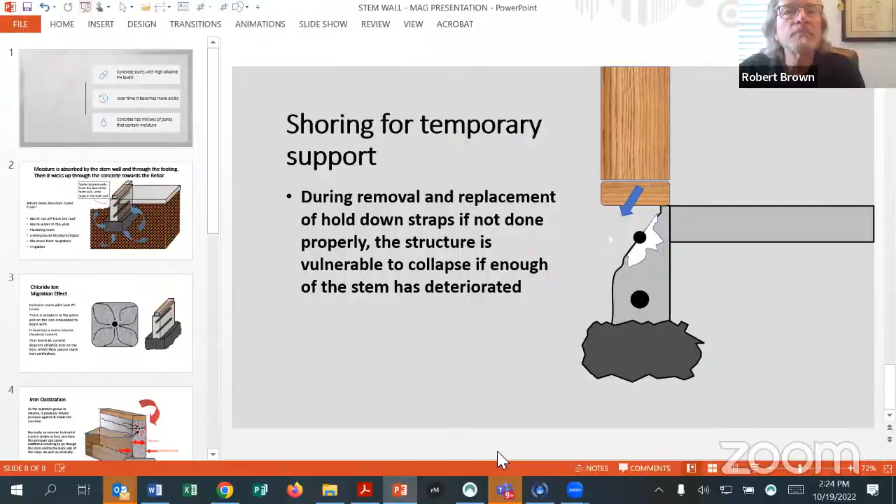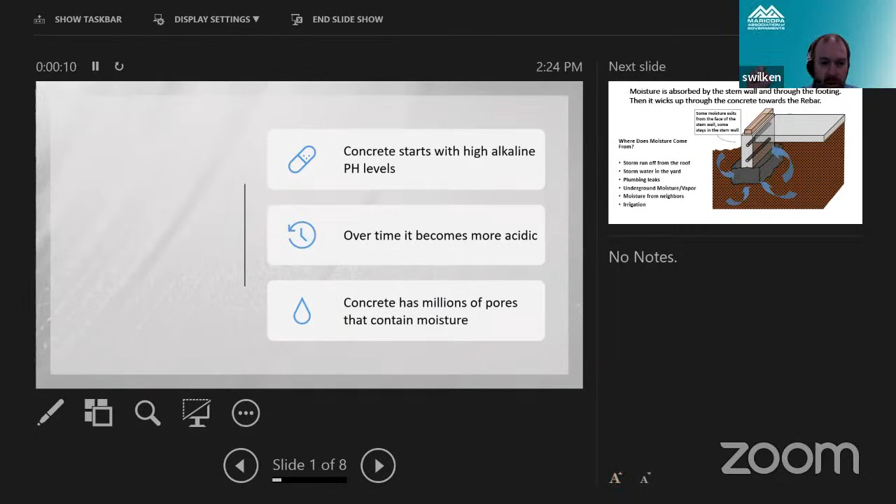We'll move on to item 4, stem wall repair requirements. Presenting is Bob Brown. Yes. Are you ready for me? Yeah, this item is for information and discussion after the presentation, okay? Okay, great. So I'm going to share my screen just to help everybody understand what we're talking about, since it's not widely understood. All right, can everybody see my screen? Looks good. We're seeing the presenter slide portions. Yes, right. Okay, great.

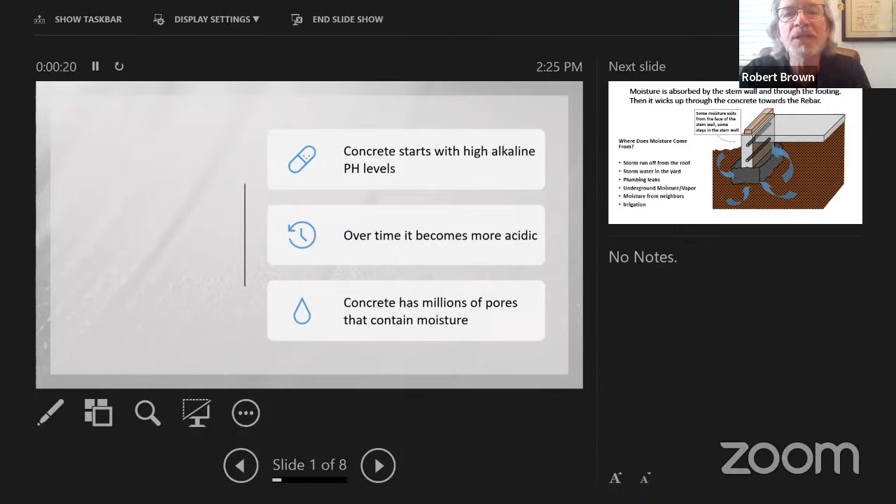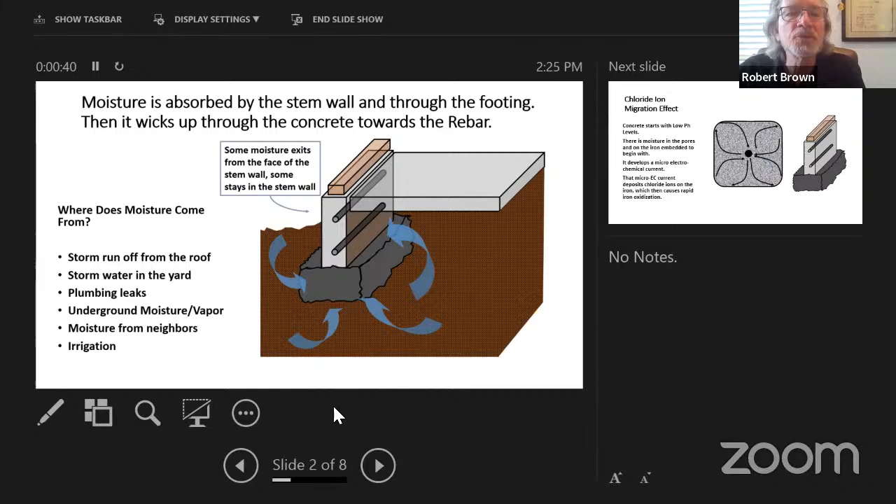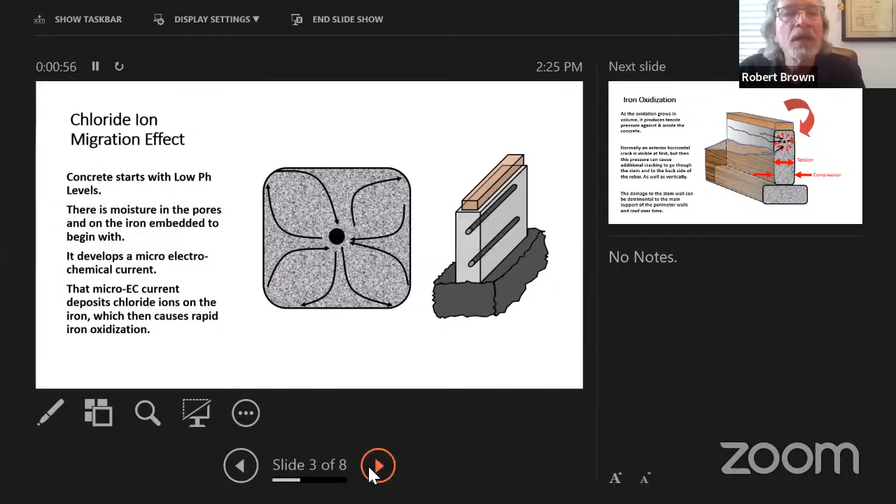So first of all, concrete, as you might know, starts out at a fairly high alkaline pH level. Over time, it becomes more acidic, and has lots of pores that transmit water readily. Subject to the ground, water enters these pores in the concrete, travels up the stem wall, and exits the side that's exposed to the face. And during that path of travel, it intercepts usually the top rebar and causes problems. When that happens, you get a chloride ion migration effect where the rusting of the rebar is accelerated through an ion exchange. And when this happens, the iron oxide basically takes up more room than iron, becomes weaker, but takes up more room and starts putting pressure on the concrete, causing the cracks that you can see here.

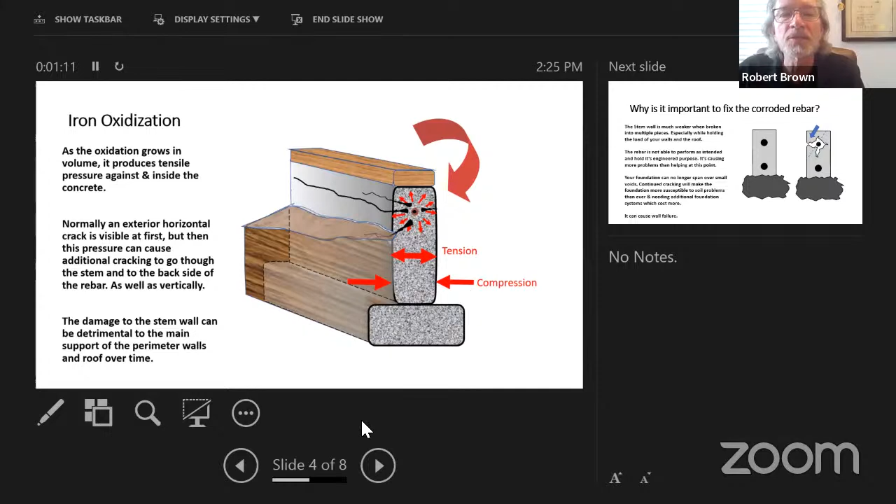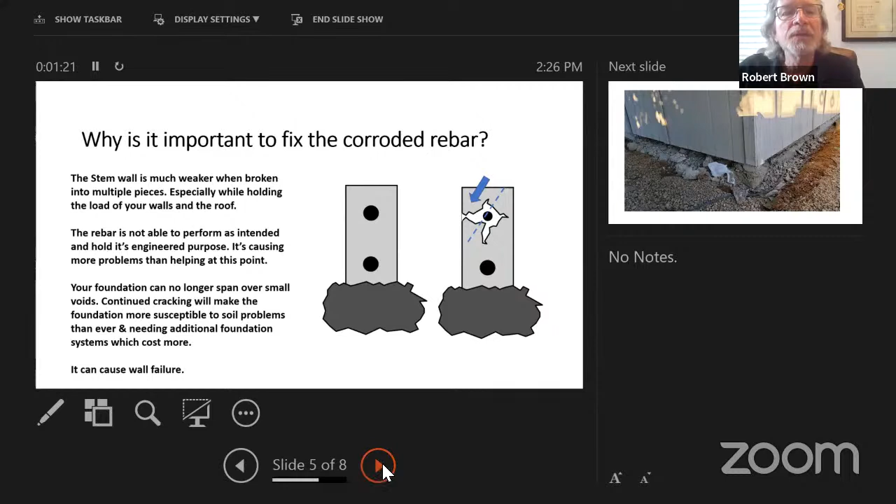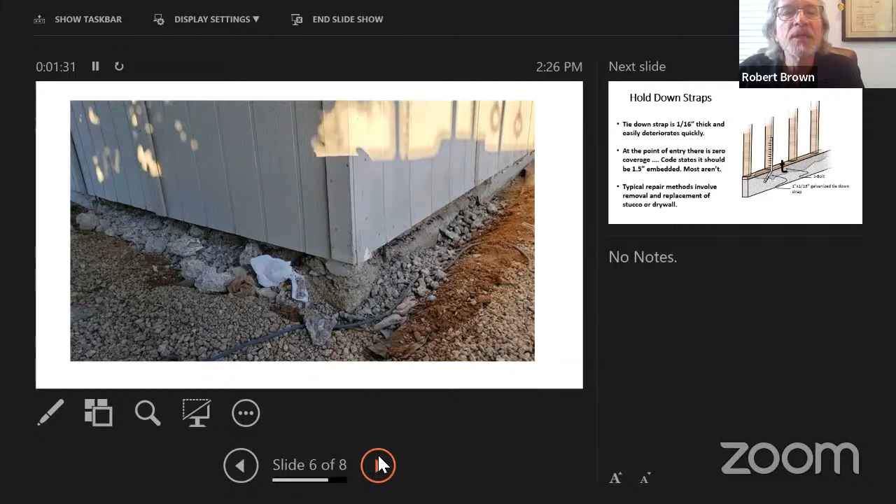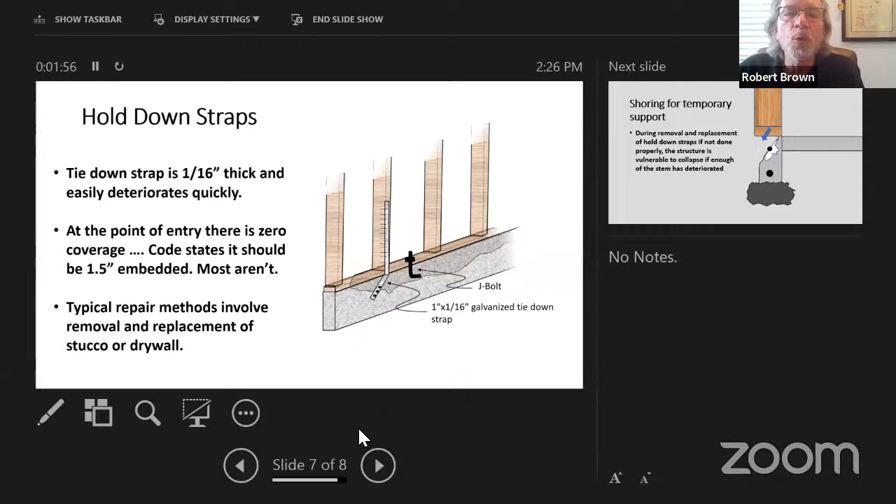Over time, you can basically have problems all around that top rebar. And this is what it looks like. In an extreme version, it starts out with just a crack and over time ends up like this. And just a few more things to talk about real quick. Hold down straps are also affected, which are problematic because they're on the outside and angle in, allowing the water to travel along that angle and deteriorate those, as well as J-bolts that are used basically to hold the walls in shear. And the problem is you get a lot of deterioration. You can have a problem like this. And sometimes in the course of doing the repairs, if you don't shore it, you can actually be at risk for slipping sideways and causing problems to the load-bearing wall on the perimeter.

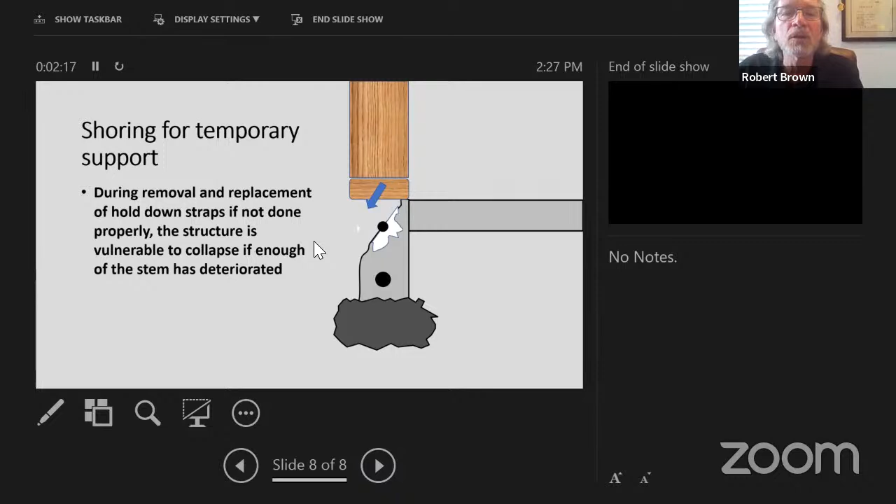So that's just a quick part of what I would like to talk about today. Now, in the past, this has not been permitted regularly. The City of Phoenix has required all of it to be permitted, which I support.

I think it's a good idea. There's been a hodgepodge of approaches throughout the various cities on this. Some cities don't require any permitting whatsoever. Some cities only require permitting when there's a complete rebuild.

In other words, a complete rebuild would be like the stem wall is completely deteriorated, where there's no soil on the other side, like a garage or something like that, and/or an area where it has just completely deteriorated even next to the soil. And so those cities for anything longer than 4 feet have required permits. So there is kind of a mixture of approach that's not very uniform throughout the metro area.

And right now, some cities, even Avondale, will say, okay, it's up to the workman on site. If you go back a certain depth, it's required to be a permit. I think that's impractical because no workman is going to stop the job in the middle of his work when he excavates too far back into the concrete and then realizes that he's beyond the safety zone and is going to shut it down and go get a permit. I just think that's probably not going to happen.

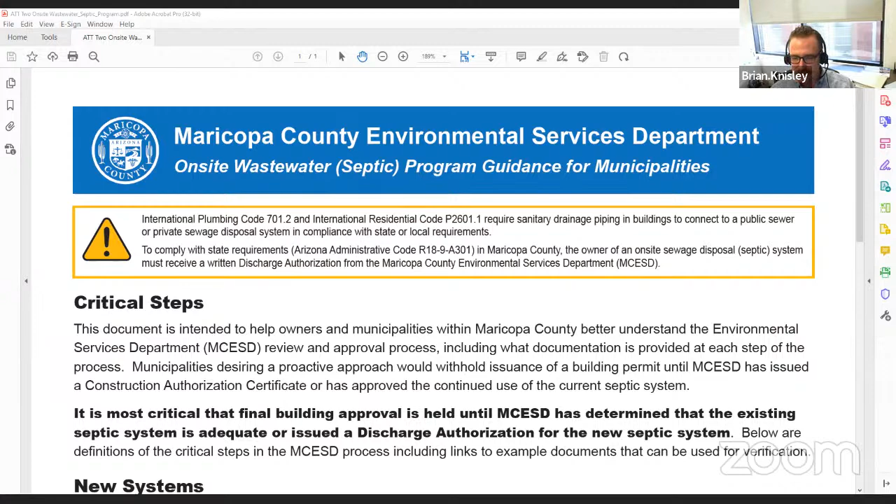So below are some definitions of how our process works and our permitting system works. Frequently, what happens is they'll submit their application. After they submit their application, we'll review the plans and we'll issue a construction authorization or a certificate of approval to construct. This can be a bit of a pressure point between us and building jurisdictions, because we may require additional grading and drainage information or changes to the plan.

And if we do, we would expect that the client go back to the building jurisdiction and submit the updated plans. So preferably what would happen is you would withhold a construction authorization or certificate of construction approval on your end until you see a certificate from us saying that construction is approved for the wastewater treatment system.

The next step after that is that they install the system, it's inspected by us and then permitted. And what the resident will get at that point is a discharge authorization, and they'll also get a white tag. A white tag is what we physically leave behind, and the discharge authorization is the official document, but they both indicate an approved system. And it's imperative, in our opinion, that final building approval be held off until we've issued our discharge authorization, and you can be assured that the property has a permitted sewage disposal system on the site serving the property.

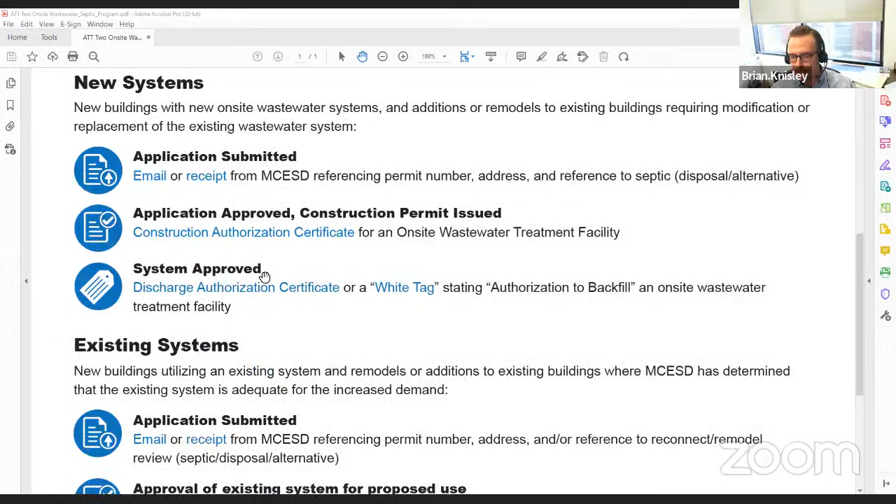There's a second scenario for existing systems. So that was new systems. That would be new construction, new businesses, new residences. There's a second scenario with existing systems where somebody's proposing essentially to remodel or alter their property, and we review the property to make sure whatever changes they're doing to the building, adding bathroom, bedroom, livable space, that the existing septic system is prepared to handle that change in use.

And what we have with those is they'll submit their application, and then they'll get approval to proceed with the construction. And this can go one of two ways that creates a pressure point. Frequently what will happen is we determine that their proposed construction is in excess of what their septic system can handle. So we will require them to submit for a new system or replace components of the system.

If a property were to get final building approval for the remodel prior to us issuing a certificate of approval for the construction, this can lead to really messy legal situations on our side. We've had several examples of properties that have received final building approval for their proposed remodel, and our permit expires. We go back in and realize they proceeded with the construction and ignored our compliance items on that permit.

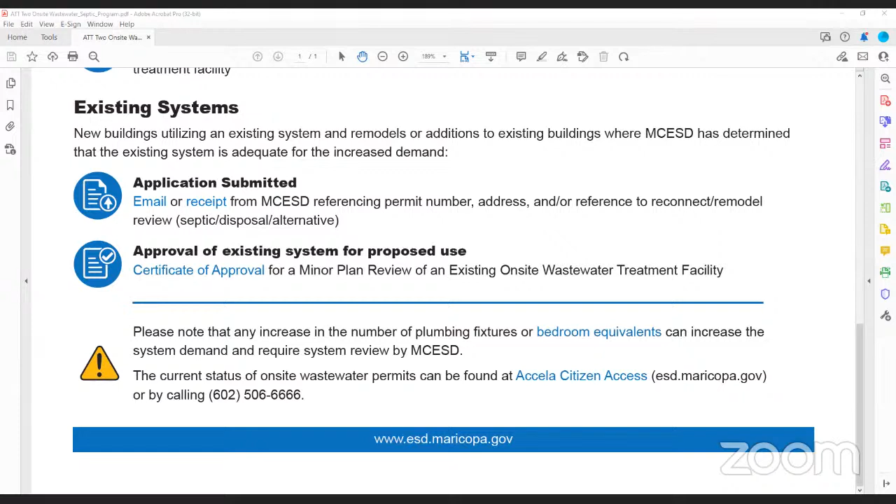Hey, Brian, one more question. Do you have the information searchable by address or parcel number so it can be verified? We do. If you go to Accela Citizen Access, it's the hyperlink at the bottom of this. If you have a permit number, you can look up where it is in our permitting process, whether it's past the construction authorization stage or past the discharge authorization stage. And if you investigate that part of the website, you'll notice that once a septic system is complete, we post it to public record. So it should be easily searchable.

If you're looking for an approved permit, we add those to public record usually within 24 to 48 hours after they are approved, so that should be pretty quick too. The Accela link is, I think, the very last link at the bottom of the document. You can search by permit number or address and view the status, essentially where we're at in the workflow on a particular permit.

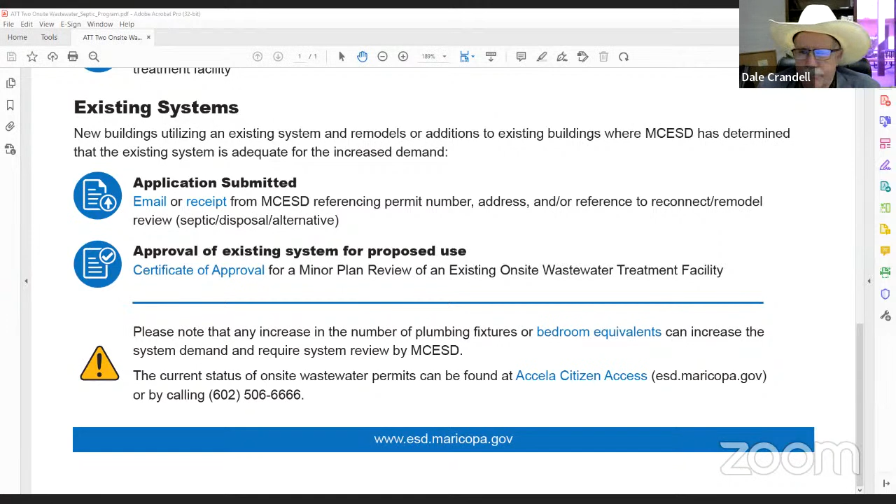Okay, moving on to item number 6, updates to MAG Building Code Committee memberships. Please provide any updates to the MAG Building Code Committee membership list to Scott. Okay, are there any updates at all from anybody?

All right, now we'll move to item number 7, update survey for code adoptions. Please provide Scott with any updates to surveys for the new code adoptions. Has anybody got their code adoptions going yet? Maricopa County is on the 2018 IBC or I-Codes and the 2017 NEC. And I think I already got it to you, Scott. We adopted the 21s in July. And Scottsdale just recently adopted the 21 codes, going into effect January 1st.

I know a few of you got them to me after this went out, but I'm going to make sure I've got all these. So Scottsdale adopted the 21 codes, yes, and Cave Creek did which ones? 21. What are the effective dates for Cave Creek? July 1, passed. And what about Scottsdale, what was that effective date? It'll be January 1st, with the exception of the green construction code. There's some discussion as to whether to make that mandatory, and that's the one that hasn't been adopted yet. We would have an effective date probably January of '24. That would be a recommendation anyway; council hasn't taken action on that yet. And what was the effective date for Maricopa County? 19 September.